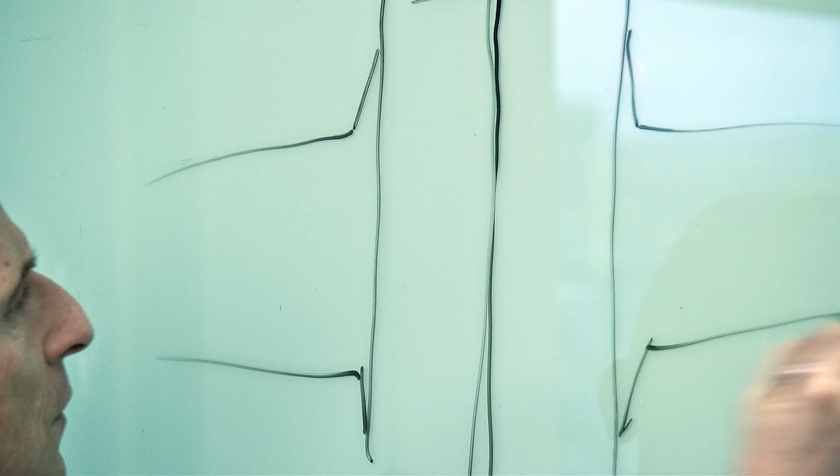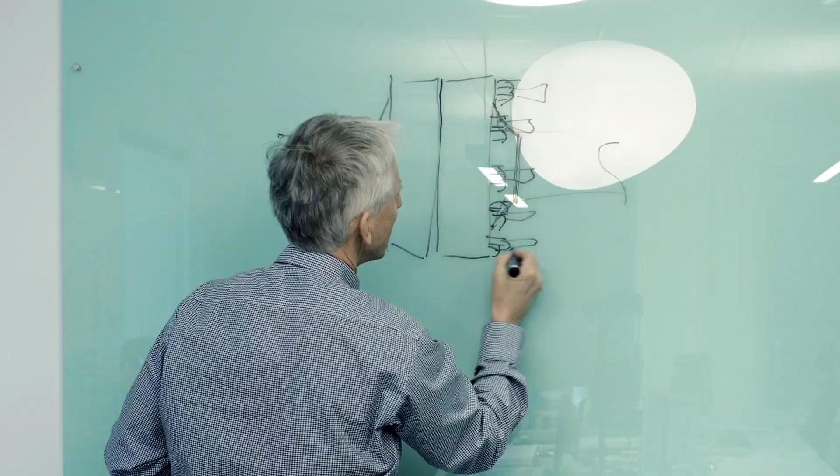Here we have what we call a flange coupling with a pipeline. The problem is that we have all these bolts and nuts all around here, and the hole is in between. So how do you access and seal off a hole there?

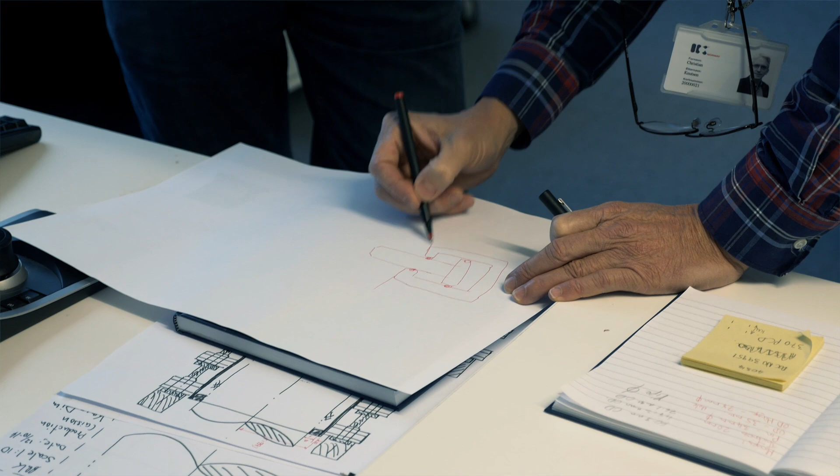The fact that the water injection pipeline had to be shut down meant that production was also reduced, so it was paramount for the client to have this repaired as quickly as possible. A project team was quickly set up to design, engineer, and test the clamp as fast as possible to avoid unnecessary delay and loss of production.

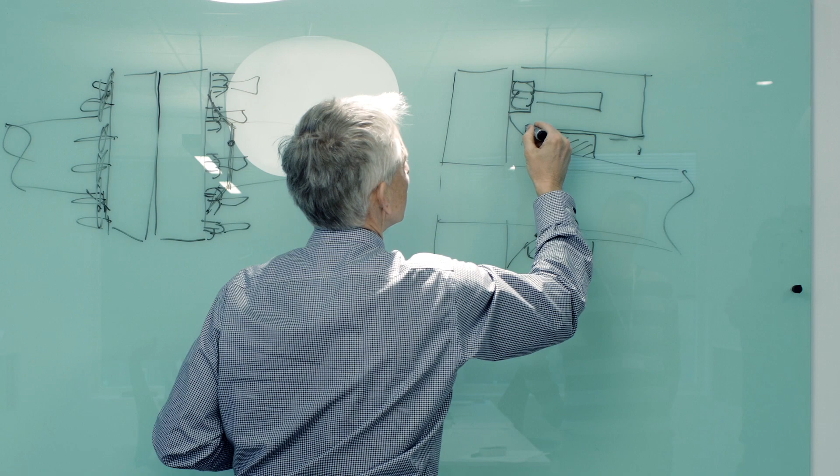It was proposed by us to place a packer all around here and then compress it with a steel housing that goes around, and a setting ring. So we can compress this rubber and seal against the leakage directly onto the hole.

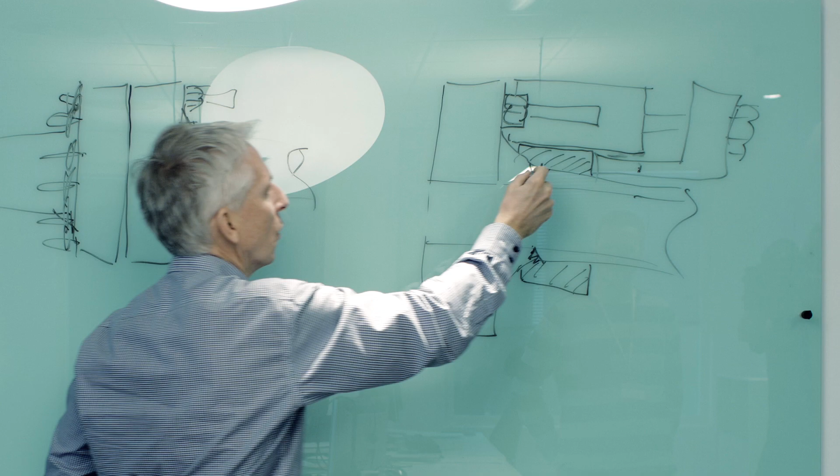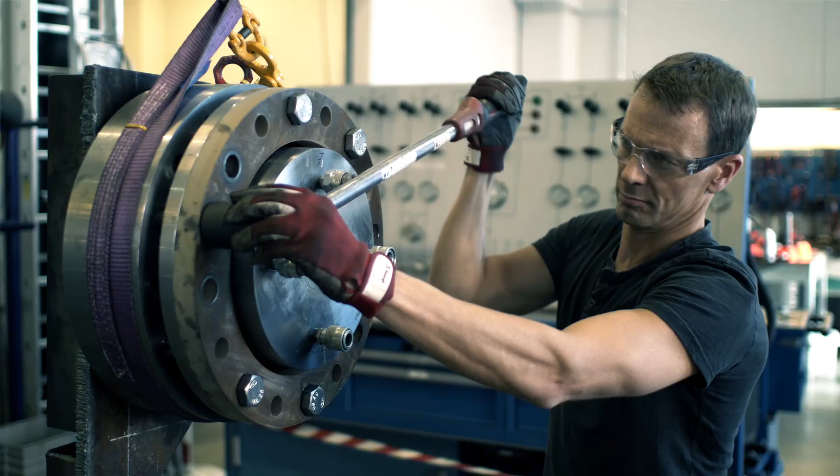Parallel with the design tasks, and before we would be able to test on a test rig made of an actual compact flange, we had to confirm and test the packer's functionality and ability to seal a hole. According to the inspection of the pipe and the location, a test plan was developed, keeping in mind the criteria of working with high pressure and general safe working practice.

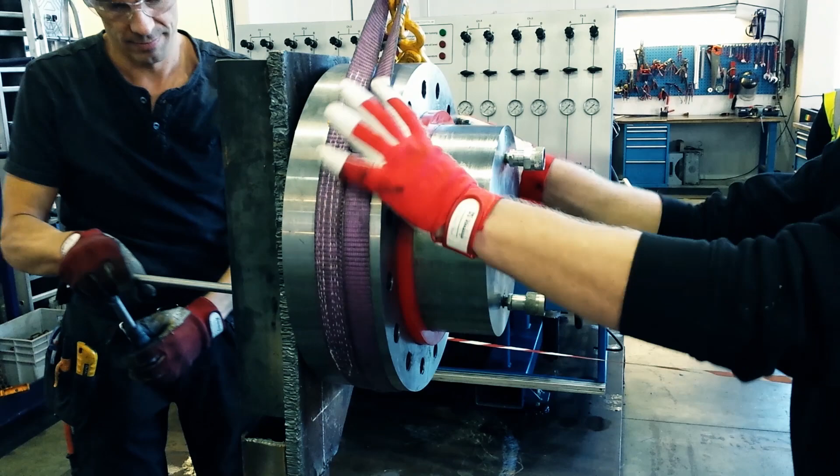The main test factors we had to figure out were the hardness of the packers, just to get a feel for how it behaves under the conditions we tested it.

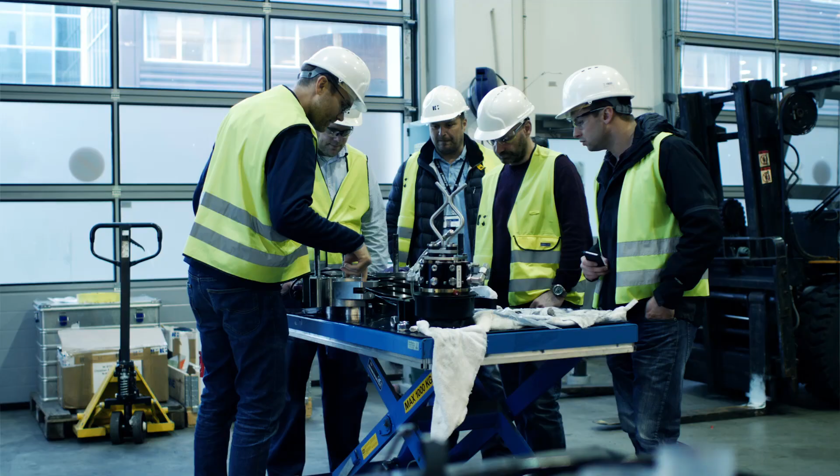The marine contractor has been in the loop, and communications picked up during critical design decisions regarding installation. The importance of having these guys on board cannot be stressed enough. This goes not only for fast-track projects like this, but for any project. Eventually, they are the actual users, and our customers only facilitate.

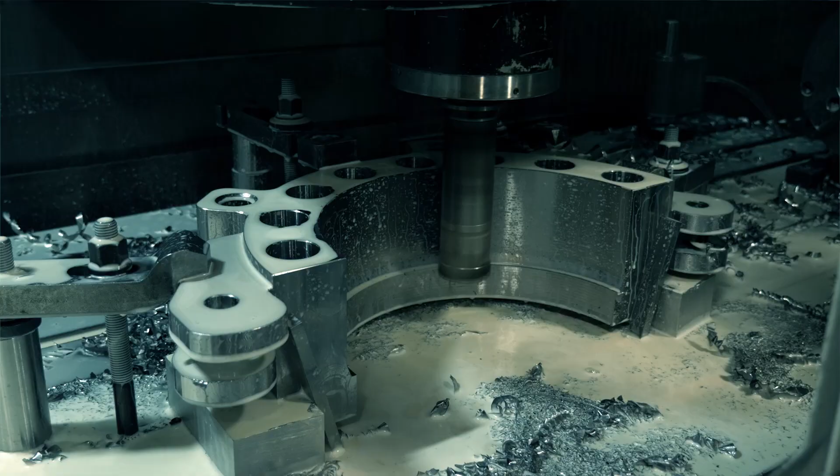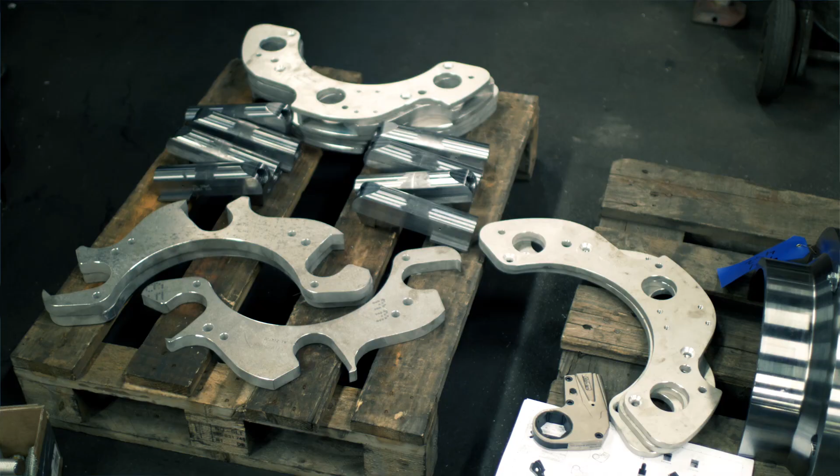Manufacturing of the parts was now ongoing night and day. Luckily, we are fortunate to have exceptionally good suppliers that are both willing and capable to follow us on these adventures we indulge ourselves in when we have fast-track projects like this.

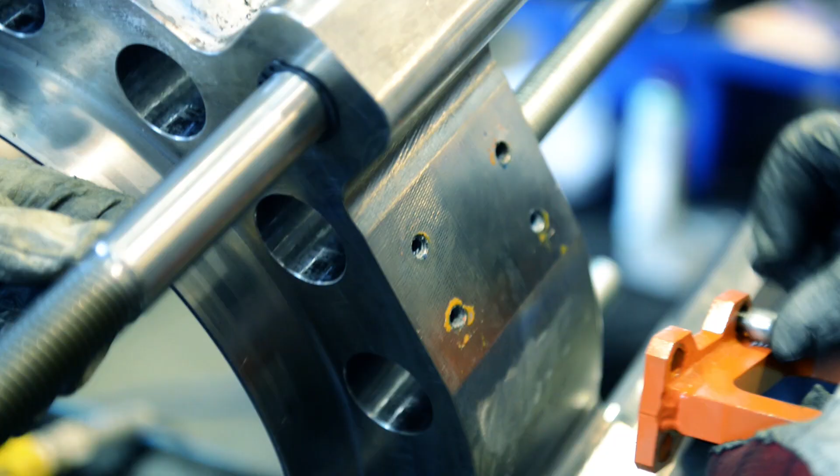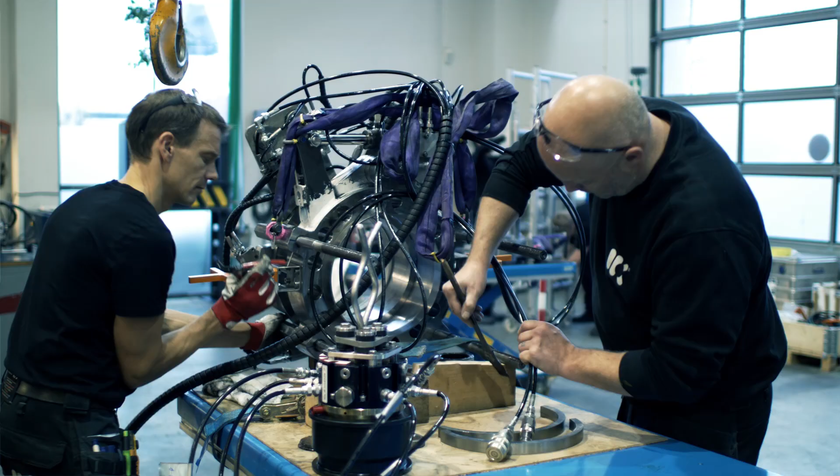When receiving all our parts, both locally and internationally sourced, our technicians dived right into the task of assembling the clamps together. In addition to the clamp, we also had to manufacture a makeup tool for the installation of the clamp. Basically, they are custom torque tools with some rather intriguing hydraulics.

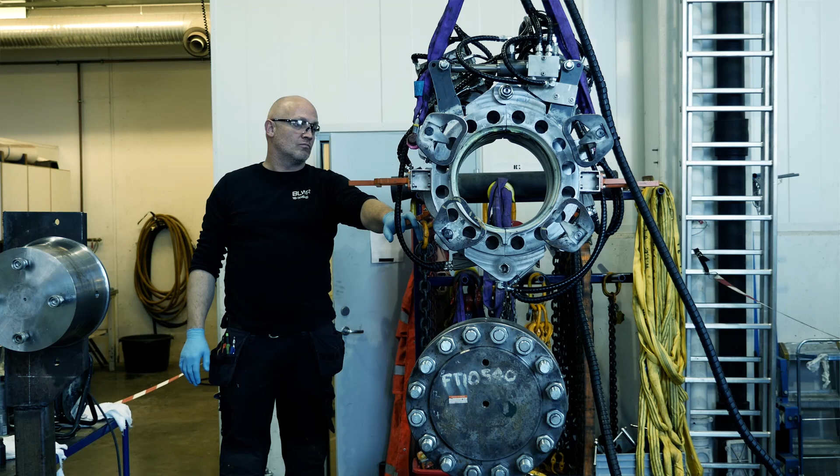One of the keys in a project like this is to ensure that the test setup is as representative as possible of the actual conditions. This means pushing the envelope to the edge.

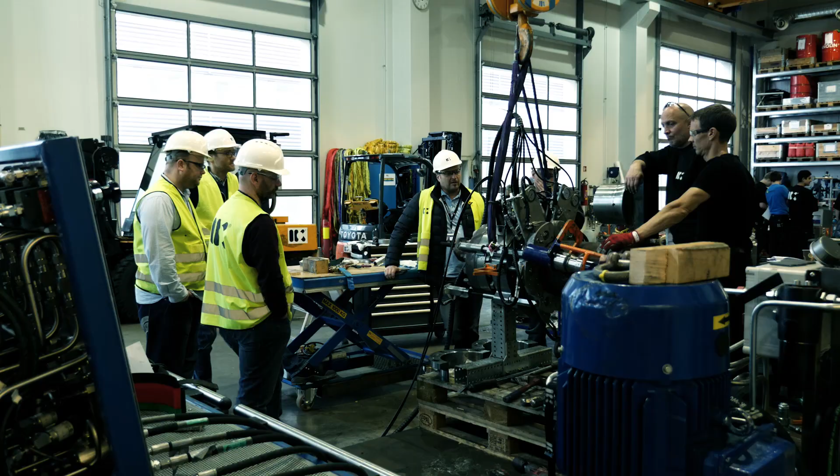I think the water depth is close to 400 meters, so you have to go down with an ROV and remotely do all the operations.

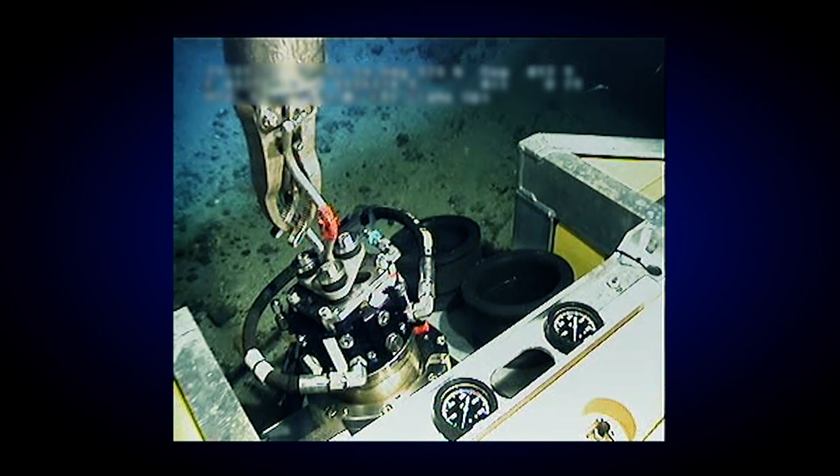During the installation, there were no showstoppers and unsolvable problems. The clamp fit the pipe, and the hole was successfully sealed off. They got the water injection back in production, the pressure increased in the reservoir, and they could increase production again. We made it on the original schedule.

We are proud of what we've made happen in the time frame we were presented.